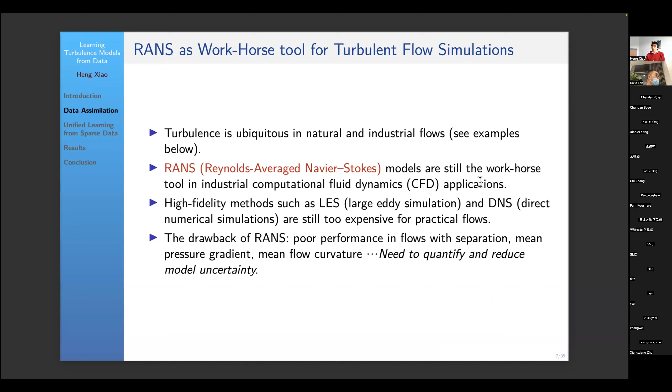But RANS has poor performance in many flows that we are interested in, and we need to understand this model uncertainty. And this was the initial motivation of our work back maybe around 10 years ago. So for those who are not familiar, I will give a very brief primer. What is the closure problem here? Here you see the incompressible Navier-Stokes equation. On the top, you see the continuity equation, and on the bottom, the momentum equation. You can solve this, but it's going to be very computationally expensive for high Reynolds numbers.

So because of that, in engineering, we typically do a Reynolds decomposition. We decompose the velocity into the mean velocity, capital U, and the fluctuation, U prime, and the same for pressure. Then you plug this into the original Navier-Stokes equation and do Reynolds averaging. You obtain a so-called RANS equation, which is very similar in form to the Navier-Stokes equation, because if you take the average of U prime, it goes to 0, by definition. So all the linear terms have the same form as in the original Navier-Stokes equation, but in terms of the mean velocity, okay?

The same form. But for the nonlinear term, that is the convection term, U dot grad U, you have a fluctuation that does not disappear. Instead, you have a covariance between the ith component of the velocity fluctuation and the jth component. So Ui prime, Uj prime, take an average, take a covariance. And this is basically the core of the closure problem in RANS modeling.

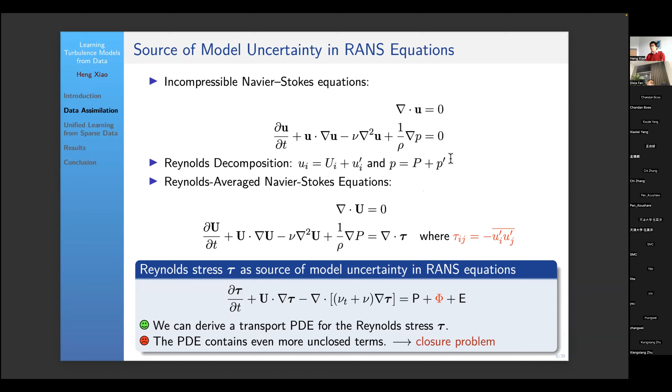Okay, but unfortunately, these PDEs contain even more unclosed terms of a high order, which are quite difficult to model. So that's basically where the difficulty comes from in this closure problem in RANS modeling. So in our early work, that was 7 or 8 years ago, we tried the following idea. That is, we inject uncertainties directly in the Reynolds stress field.

So you have a Reynolds stress predicted from the RANS model. So we basically say, hey, we have uncertainty here, we have error here. How do we infer if we have some data? Let's say if you have measurements of velocity in 10 points. How do we infer the discrepancies or the error in the Reynolds stress field? Okay? So the idea is to use sparse observation data Y, typically velocity, to reduce the model uncertainties.

So we used the ensemble Kalman method, which derived from EnKF, ensemble Kalman filtering. Here it is not a filtering problem. Filtering typically involves a time-dependent problem where data comes in sequentially. Here we have the data, we have a steady problem. So we call it EnKF, but it's really EKI, ensemble Kalman inversion. Right? So what we do is we sample the possible Reynolds stresses. We propose possibilities of Reynolds stress.

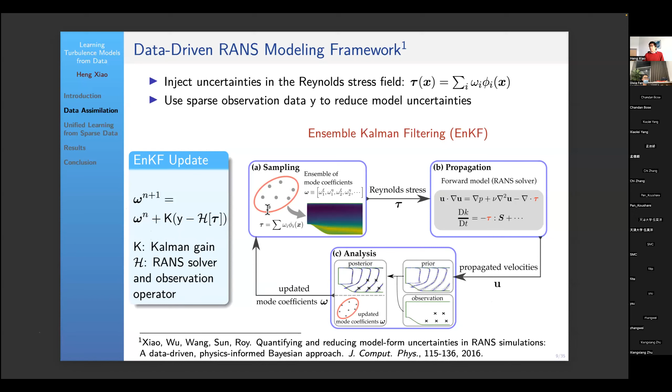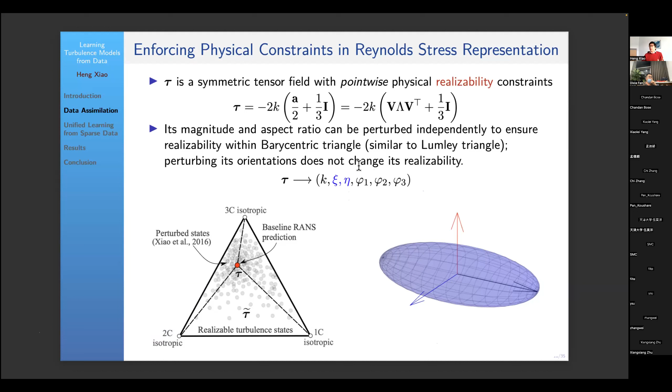Typically I would explain a little bit more on how to enforce the constraints in the Reynolds stress, because at every point your Reynolds stress, since it's a covariance matrix, must be positive definite. Anyway, let's just say that it's positive definite. And then you try not to violate these constraints. I wouldn't go into details here, but I want to mention that we sometimes also enforce other constraints such as smoothness.

If you don't have a shock, if you don't have a discontinuity in your geometry, then your Reynolds stress field would be continuous. If this is so, then you can expand it in smooth functions. So basically when you inject uncertainties, you already encode these physical constraints, such as positive definiteness and smoothness, for example.

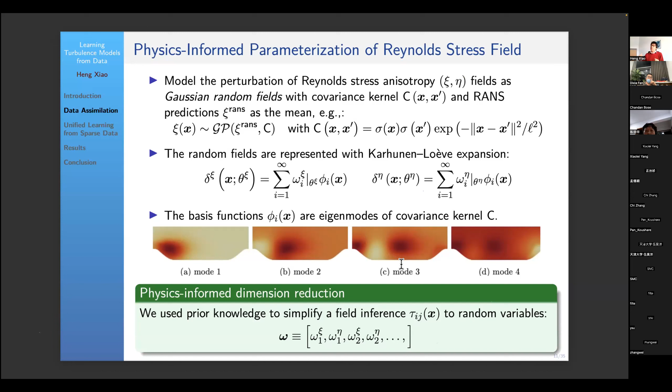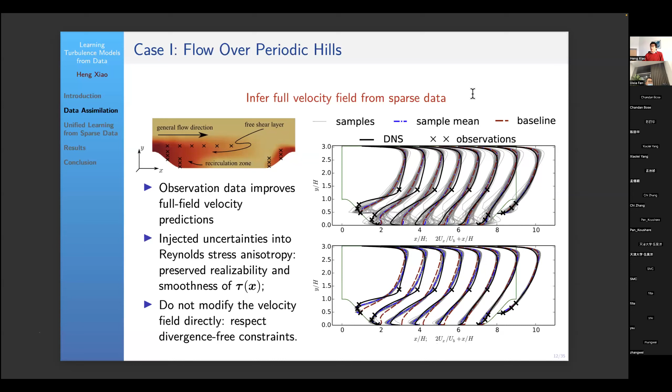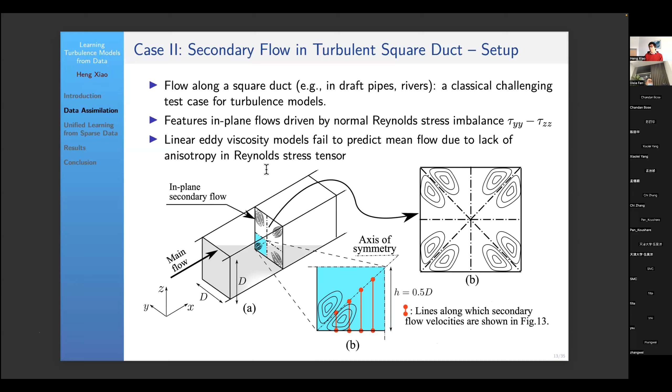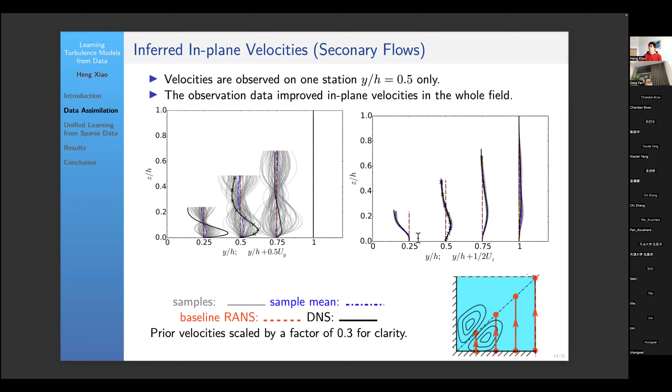This is your objective function of your optimization. But because of the covariance you inferred from the samples, all these samples, you don't do it for nothing. You want to infer covariance from these samples, and you are able to utilize this covariance to infer the mean velocities in other stations as well. So these are the early work in data assimilation.

Now, at the time, we very often got a question like, you need some measurement data in your system, right? Which is typically not applicable in aerospace engineering, because you want your CFD to be able to do design. When you are doing design or optimizing, you haven't even built your system yet, and because of that, you don't have data. So in order to support design, analysis, and optimization that is typical in aerospace engineering, you need to make predictions where you don't have data.

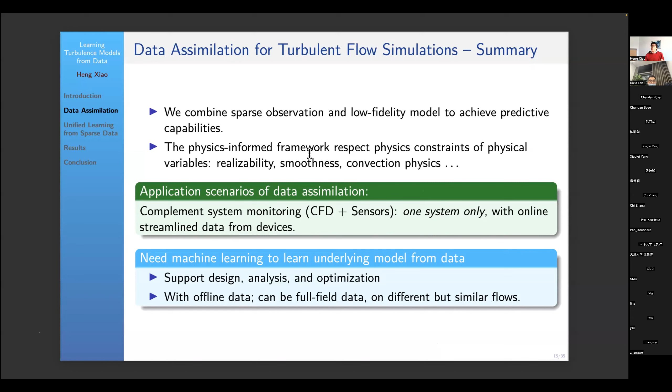But it's possible that you have some offline data. You may have a lot of data on some configurations. You have done simulations or testing, but you cannot utilize data in a configuration where you want to predict and you have not built yet. So from then on, we gradually moved towards machine learning. But the idea is similar. In the very early days, it was not even clear how to represent the model uncertainty. So we tried different things such as eigenperturbation and so on.

Eventually, we settled on the tensor basis neural network of Julia Ling and her collaborators. That's derived from the 1975 JFM paper by Pope. That is, you represent your Reynolds stress anisotropy in terms of the 10 bases T. These 10 bases are defined expressions of the strain rate and rotation rate, which are basically parts of the velocity gradient.

So you do this representation to ensure invariance. That is, if you translate or rotate your frame, this function will be invariant. This θ1 to θ5, all these are the invariants of the strain rate and rotation rate.

Now, we changed the method and the setting, but the problem still remains. That is, if you have data, as we have explained before, in one configuration, the data are typically sparse, like the velocity, but it could even be just drag and lift. But you don't have the Reynolds stress. If you have the Reynolds stress, then things are good.

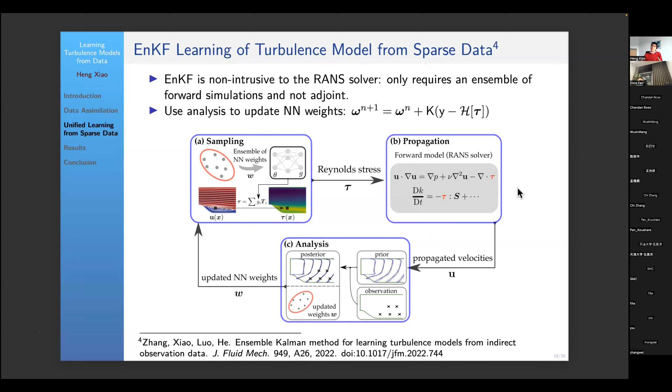And now what is different from the data assimilation world? For example, if you have a slightly different geometry, it's possible that you can generalize your learned model to the new geometry, right? Because it doesn't care about your field; it takes the mean velocity at every point locally and maps it to the Reynolds stress. So there's a hope that it can be generalized, at least in the same class of flows.

And we did a test on the square duct flow, which we have discussed before. Now recall that the Reynolds stress, the turbulence model, is represented in terms of the G functions. Theta 1 and 2 are the invariants of the strain rate and the rotation rate. And these are the coefficients of the tensor T. So basically, this is the quadratic model, written in Pope's formulation.

And the baseline model is basically G1 equals minus C mu, which is 0.09. The red is constant. And the truth, according to this expression, is this. And with the adjoint and the ensemble learning, we come to this. It's not too bad. At least it's not a constant.

And for G2, well, we can't really infer G2, but a linear combination, because for this particular flow, only the combination of these three coefficients would influence the observed velocities. So we're learning this. And you can see it's not particularly good, but there is a reason for it. In the next slide, you will see that most of the data is concentrated in the region where theta 1 is large. In the region where theta is small, we don't have that much data in this flow. So in order to learn this, you would probably have to include more data.

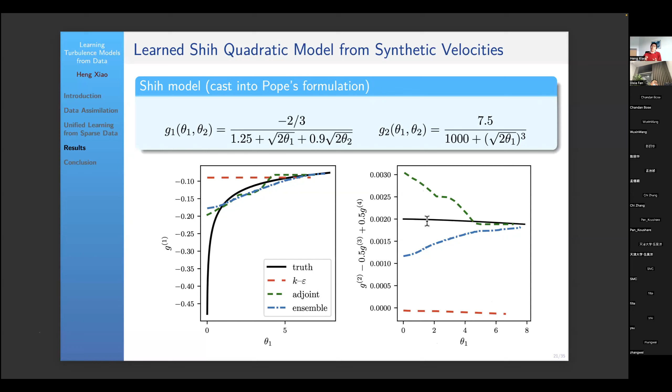And this is what we are showing. That is the scatter plot or the cloud plot of theta 1, the truth and prediction, and you can see the density. Most of it is above 5. Because of that, you can only learn this. There's no magic here. You can only learn the part of the model that is informed by the data.

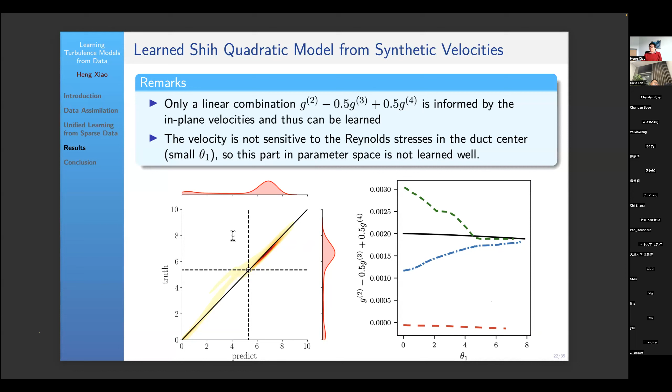So our conclusion so far is that we have found that the ensemble Kalman method is comparable to the adjoint method in terms of the results. And we even found faster convergence of the ensemble method, because even though it's based on a very approximate gradient, it comes with the Hessian, the second order gradient, and that helped accelerate the convergence.

But I have to admit that this is not a fair comparison, because I'm not claiming to be an expert of anything, but in particular I have more experience in the ensemble method than adjoint. So somebody who knows adjoint and does it very well may get comparable results, but nobody can argue that developing an adjoint for an arbitrary solver is quite labor intensive, let's put it this way, if possible at all.

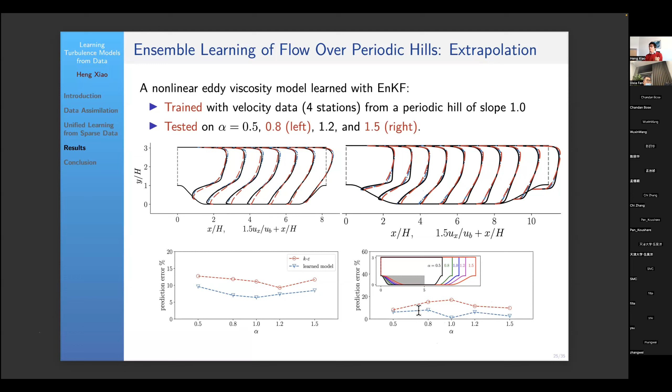Again, black is the ground truth, red is the baseline, and the blue is the learned model. So you can see here. And now, if you look at the integrated error, you can see that here is the trained configuration. In the untrained configuration, across the board, the learned model is superior to the baseline model. In certain cases, not so, but still across the board it is quite convincing.

And we also did a case where we only learn with lift coefficient on airfoils of different angle of attack. So we trained with angle of attack of 8 degrees and 14 degrees. One is attached flow and the other is separated. And then you can see that the experiment data is here and the baseline is here, k-omega. You can see that for the attached flow, the baseline model is quite good. It's tuned for this purpose.

But for the separated flow, clearly it overpredicts the lift coefficient. When you ask it to do the optimization to tune the model, it would agree in the separated case, 14 degrees, and keep a similar performance in the attached case. So this is the pressure coefficients of these two. It's a little chopped off, but on the left is the attached, 8 degrees, and on the right is the separated case. You can see that it overpredicts that part.

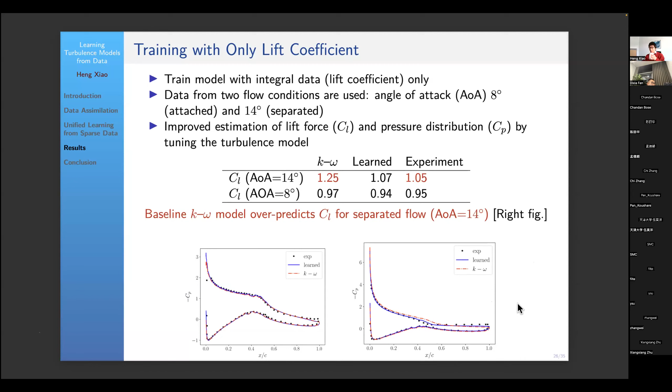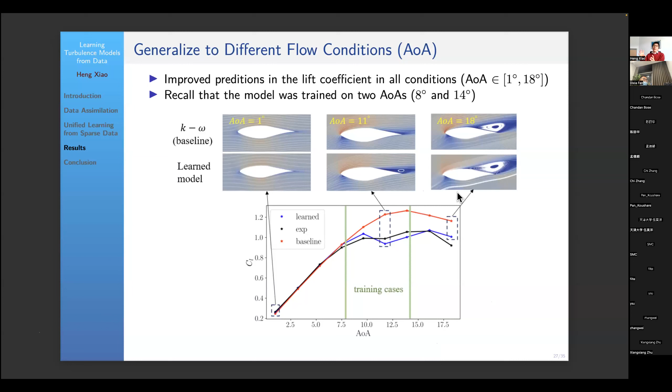And you can see here, for example, that in the baseline there's no separation bubble, and the learned model gives you a separation. And here at 18 degrees, it gives you a bigger separation than the baseline. So basically the learned model lets you separate early. But remember, we're only tuning the neural network that represents the turbulence model, right? We don't directly mess with the separation locations or anything like this.

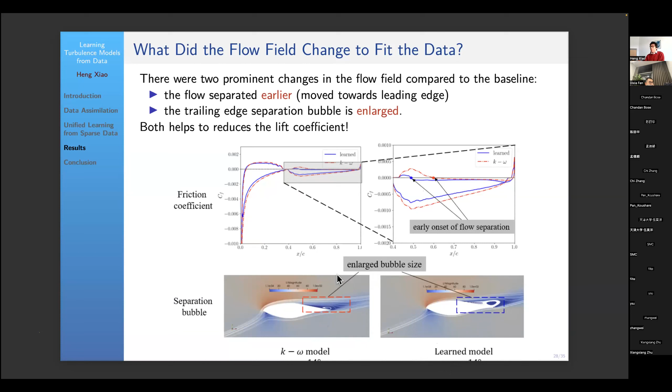What we found is basically what I said in the previous slide, that the learned model gives you earlier separation and thus enlarges the bubble size. If you know a little bit about aerodynamics, when you separate, you have a smaller lift, because you lose lift when you separate. Your pressure drops.

So how did we achieve that? We found that basically the eddy viscosity term, because this is now a variable C mu. Before it was a constant 0.09. Now it decreased this eddy viscosity at the leading edge so that it would induce an early onset of flow separation. Now we effectively have a spatially varying C mu. So that's very good. We didn't specifically ask it to do it, but it finds that this is the only way to have the lift coefficient match the experimental data, and that's how it tuned.

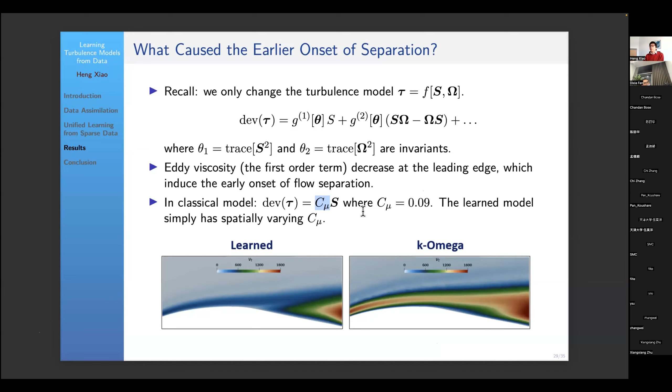But then when we use this on a square duct, a spatially varying C mu would not be sufficient, because in this particular flow you need a nonlinear term. So this is the linear term. The C mu is in the linear term, G1. The nonlinear term must be activated if you're talking about the square duct flow and the in-plane velocity. And what we found is that it kind of figured this out.

In the airfoil case, the nonlinear term, the quadratic term, is much smaller than the linear term. But this is not so in the square duct, where the quadratic term is comparable to the linear term, because this is the only way you get some in-plane velocities. So there is some flexibility in this model depending on the flow. But we are still in the process of trying to figure out, can you do this at the same time? Right here, we do this separately.

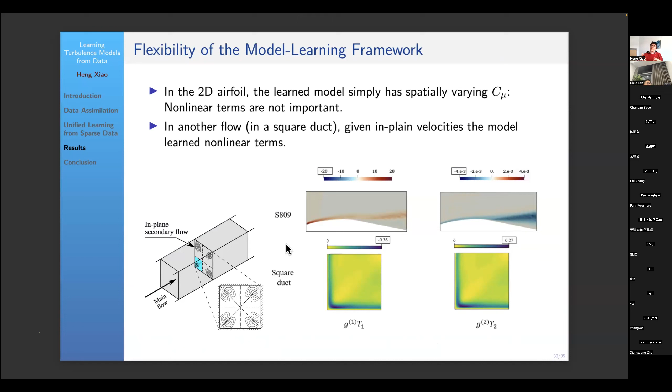We optimize for one flow and we did one thing to match the data. In another flow, it would tune another term to match the data. Okay, and in these two cases, the things the model did was correct, somehow, but we really want a case where we have a single model that can activate the correct mechanism for each flow. And we haven't been able to do that yet.

In the interest of time, I have some thoughts that I don't want to go into. This is a little tricky, but basically the idea is that we want to utilize both the Reynolds stress data and the velocity and lift and drag data. So here we have a paper that is upcoming to deal with this issue. At least in my opinion, these kinds of frameworks are needed, because you need to utilize data at all various levels.

Indirect data, of course, is good. You can very easily measure them, but direct data, if you have them, you should also use them. And what we found is that by combining data at different places, they are able to learn a more generalizable model with more sparse data.

It makes sense, because the Reynolds stress data space and the integral quantity, like the velocity data space and the lift, are different. They look at different things, and if you combine them, you can constrain better. It's better than a lot of velocity data or a lot of Reynolds stress data. That's basically the lessons we learned, and our paper is in process. So maybe we'll talk about it on another occasion.

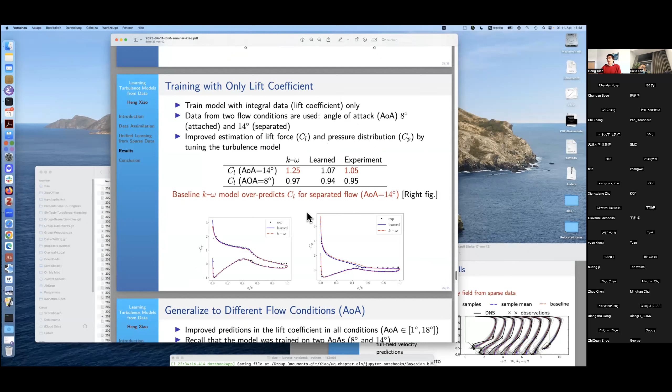I would say this is probably a very special case where the whole airfoil problem is dominated by the lift, right? If you do this separation right, you will get the lift right, and the whole thing is the separation. So there's only one mechanism, one quantity, so it worked. I'm not sure this can be generalized. I mean, this case has been investigated by several other groups.

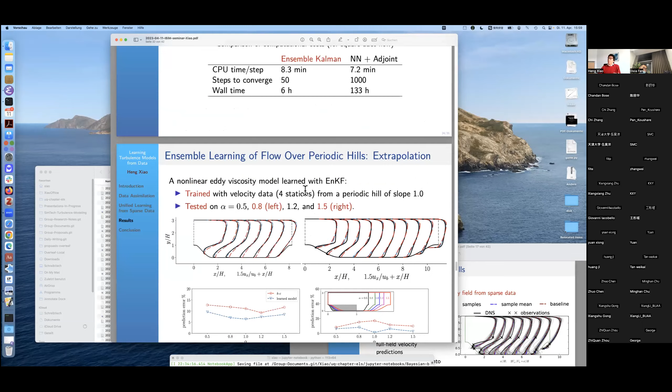This setting, right? Using only the lift data, it's amazing, but I'm not sure if you say, for example, in the periodic hill, I tried here. I think several groups have tried using even a few lines of velocity and it didn't work very well, because there are several mechanisms here that you cannot just learn with just a few points. So I think it's flow dependent.

I don't have a systematic answer, but I think our next work, hopefully in the coming years, would be how do you have a data independent framework where no matter what data you have, you are going to learn the same model, except that the more data you have, the less uncertainty you have. And this is the ideal scenario in model learning or in Bayesian inference, right? If you have different answers depending on the position of the sensors, then I would feel uncomfortable because this is too kind of artificial, right? So good question.

Thank you very much. It's a really clear and honest reply. So yeah, really appreciate it. Thanks. Thank you, Giovanni. Thank you. Any more questions?

Since maybe other people may have other questions, I want to follow up on Giovanni's question, Professor Xiao. So the question here is again on the sparse data, on the sensor placement, on the location. Since you mentioned the UQ, there may be a follow-up idea of active learning. So say you have the sensors here. Maybe at the beginning I didn't place the perfect sparse location, or I don't have enough sparse sensors.